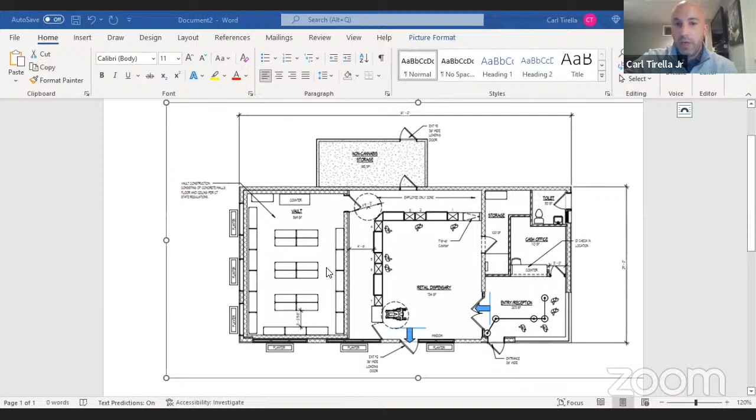Stephen Hambrecht, did you want to add anything about the site or the building? Hello, Stephen Hambrecht, I'm the architect on the project at Hambrecht Olson Design. No, I think Carl covered it. He mentioned that we will be modifying the drawing to respond to the staff comments, but Carl covered it. Okay, no additional comments.

Thank you. This facility is going to be open during the hours permitted by the zoning regulations, which is Monday through Saturday from 9 a.m. to 8 p.m., and on Sundays from 9 a.m. to 3 p.m.

With respect to the site itself, we will add the requested sidewalk to the plans and revise the driveway in accordance with the comment from the city traffic engineer and from construction services, as well as in the staff report. There are some other changes we are going to make, such as agreeing to fix any section of the chain link fence along the periphery of the property.

Other than that, if you have any questions for us with respect to the site, I think we'll wait to discuss the overall site plan until we make those changes and come back. John Malazzi is here tonight to answer any questions you might have right now, but I really don't want to go through the plan twice when we're going to make changes to conform to many of the requests. So that's really all we have this evening, unless there's any questions for anybody.

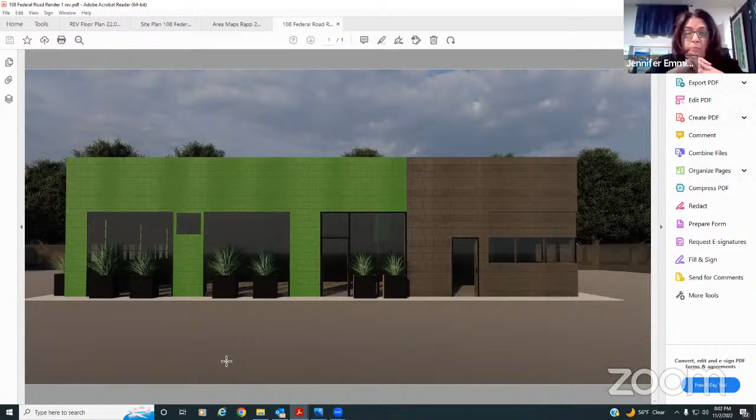Okay, so although not mentioned in our staff report, I think, and I'm posing this to the planning commission, if the color scheme, the green and the brown, is something that is consistent with Federal Road. It seems a little out of place along that portion of Federal Road. So that would be one of the staff's concerns, although not noted in the staff report, the color scheme that was chosen. If it's possible, if they could tone that down a bit and have something more consistent with Federal Road.

Jen, I'll speak to that. Yes, it's possible that we tone it down, and yes, it's possible that we change the colors altogether to be more conforming with Federal Road. We will have that submitted to you within the next week or so.

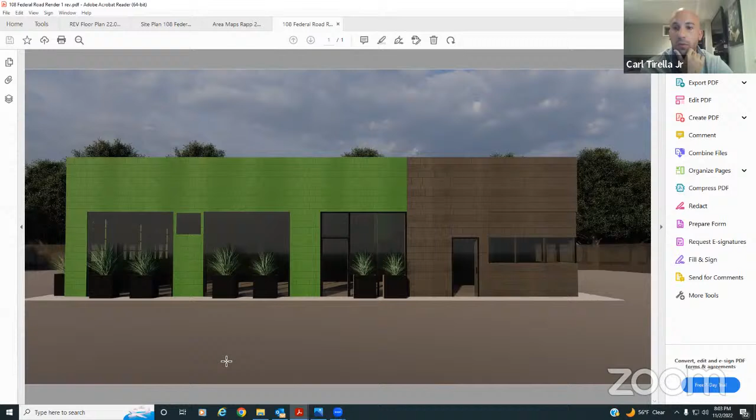So that's fine, thank you. No problem, thank you, Mr. Chairman. Thanks, Jen. And Jen, thanks also for distributing the copy of section 3C4 for everybody. That's still very new, and it's a good idea to keep that in mind as we hear these new applications. So thank you for that as well.

I did not call the opposition. Is there anyone wishing to speak in opposition to this application? Anyone in opposition? Is there anyone wishing to speak in opposition to this application?

Members, as Jennifer mentioned, I think she mentioned, we're not in any position to close this public hearing this evening. We're waiting for quite a few things. Obviously, the applicant still wants to do more of the presentation. I believe we're waiting for the police report. Anything else, Jen, are we waiting for?

Off the top of my head, I think we're waiting to hear from the chief of police. I can't remember if we have the fire marshal's report, but we'd really like to see that report from the chief of police. So my suggestion would be to keep it open. Fair enough.

One last time, commission members, any questions for the applicant at this time? Hearing none, I'll entertain a motion to continue the public hearing until our next meeting. So moved. Second. Motion made and seconded to continue this public hearing until our next meeting. Is there any discussion? All in favor, please say aye. Aye. Opposed? This matter will be continued until our next meeting on November 16th. Thank you, everybody. Have a good evening.

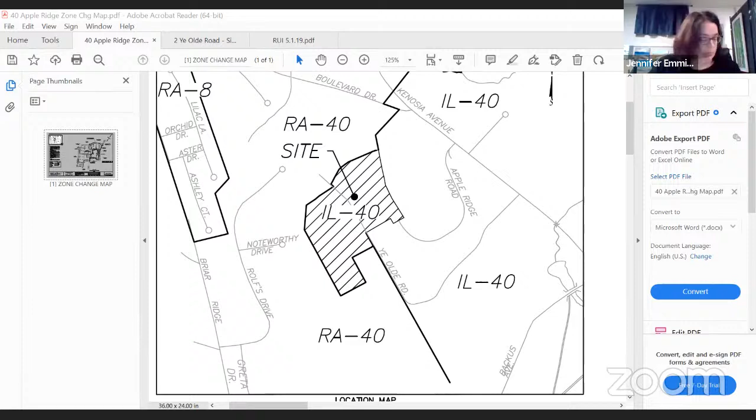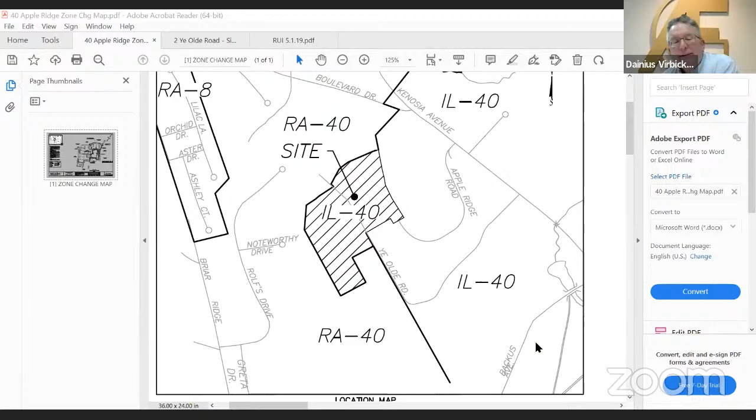Did that transfer over smoothly? No. Not able to see that picture? No, it's still on the zone change map. Oh. I'll get to it yet. Oh, here we go. How's that? Nope. Oh my gosh. Oh, there we go. There it is.

Phew, okay. So our site at 2 Ye Olde Road is located where I'm circling the pointer. And then the Cartus site, or the zone change itself, will be from about this portion on Apple Ridge Road. So again, pretty well removed from that.

Of course, you've got this Hologic building located between our proposed site and the perhaps future school campus, and then you've got this building as well.

So we're pretty well distant and shielded from the school itself. And now, if I may, I'm going to try and start sharing some of these videos, if I may, and let's see how this works.

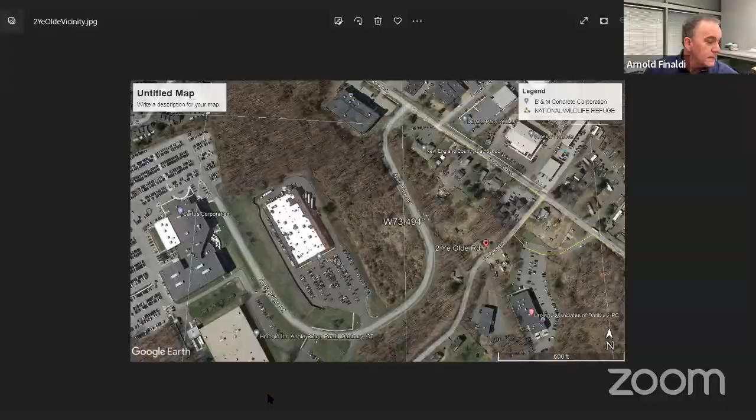So I've got it. Has that popped up on your screen yet? Yes, sir. Terrific. So this is just one of the many examples that we have of the actual trucks from Hat City driving up and down Ye Olde Road in its current condition.

And in this particular video, we happen to have it timed just by happenstance when a delivery truck is leaving the Hamar Laser site, which is located across the street. So I'll just set this in motion. It may be a little jittery, but it gets the point across.

Here you've got two vehicles traveling in either direction and clearly passing. Now I want to note that on this particular video, the road is about 21 feet wide. And that's as wide as it's going to get in this portion of Ye Olde Road.

And that limit was established by the development that took place at 43 Kenosia, which is just on the left side of this rock wall. I'm going to see if I can't get into some of these other videos.

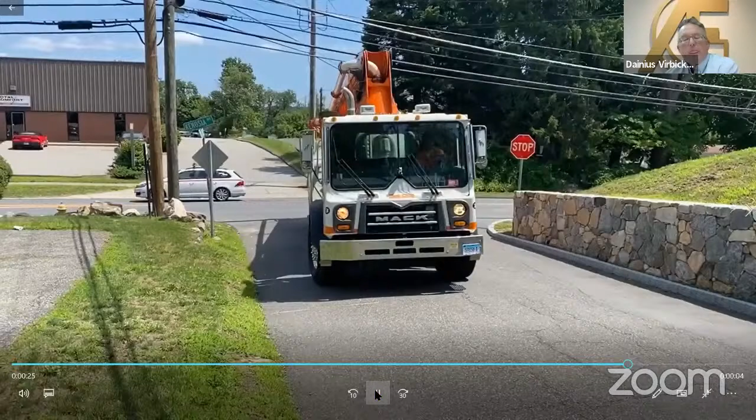And traveling pretty much without any issue or any excitement. Now I'll get into perhaps some other videos.

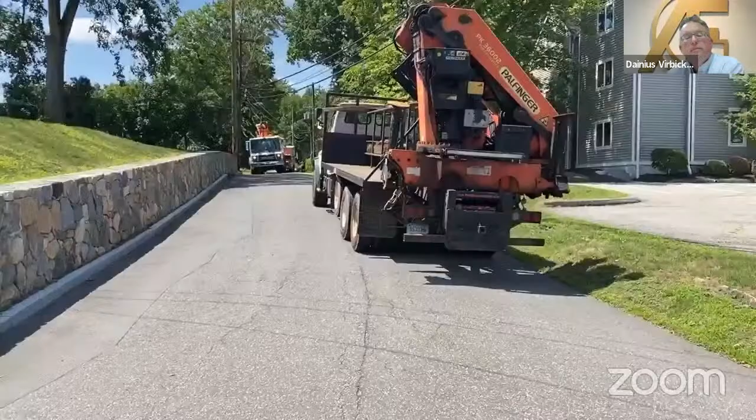And you'll note it's tight, but doable, with plenty of space on all sides of all vehicles.

So Dainius, this is Arnie. So this video demonstrates toward the end of the road, Ye Old Road near Kenosia, if you have 21 feet width, the two trucks can pass each other. Now you're going to be widening farther up the road. Is it at any point on Ye Old, after widening, narrower than 21 feet?

So yes, it does get narrower once you get beyond our property frontage. But what we're proposing with our application is to start a taper from that 21 feet up to 22 feet as we squeak in just to our property frontage, at the beginning of our property frontage or nearest to Kenosia Avenue.

And then once we've gone into our frontage, we have the luxury of being able to grant a bit of our land to the city so that we can widen the road out up to 24 feet along for the majority of our frontage. And then, of course, once our frontage runs out, we have to transition gently back down to the existing road width, which is about 21 feet at the northwest portion of our site.

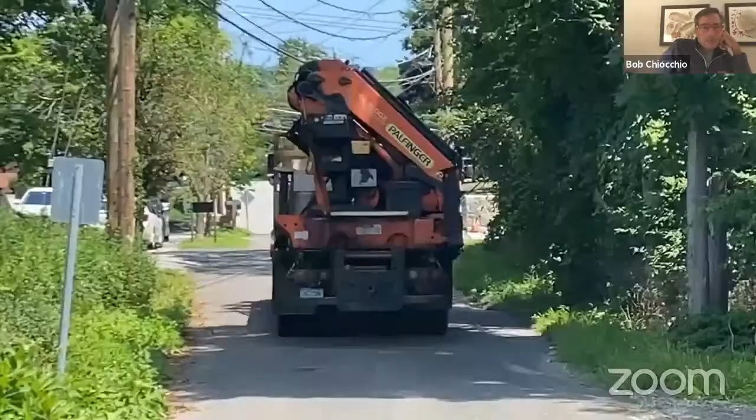Here now you'll see this truck actually leaving from the southwestern portion of the site and driving away. You basically saw it drive through the narrowest section in our frontage, which currently exists, which we will be widening out to 24 feet.

Right now, as it exists, that bit of road is about 17 feet wide. So however often the deliveries come and go to our neighbor across the street, it's clearly possible and physically possible to accomplish that task, and has been for years.

Our trips will be similar in nature, however likely not as frequent as one would think, because the number of trucks is limited and the timing of the business is such that the trucks generally leave the area by 7 o'clock. So we're trying to establish that the road works as it is and will continue to work for us.

Dainius, I'm sorry. Mr. Finaldi, have a question from Mr. Chiocchio. Go ahead, Bob. Sure. Diane, you could leave that photo up at the moment. I just want to confirm, and maybe you can go through it again just to verify as far as the width of the road.

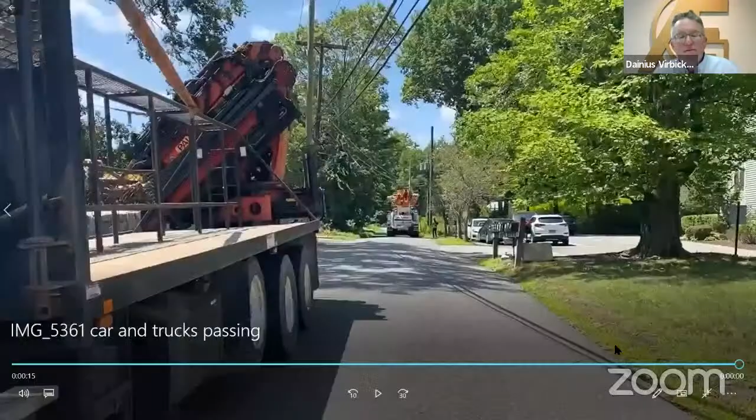Again, here's a video of somebody leaving the site, just a standard van, and then 2 trucks from Hat City passing side by side, again in a 21-foot wide section of road—clearly physically possible without any excitement at all.

Here's a pumper truck now turning in from Kenosia. I know that there are some questions about how the trucks are able to turn in, turn out, and such.

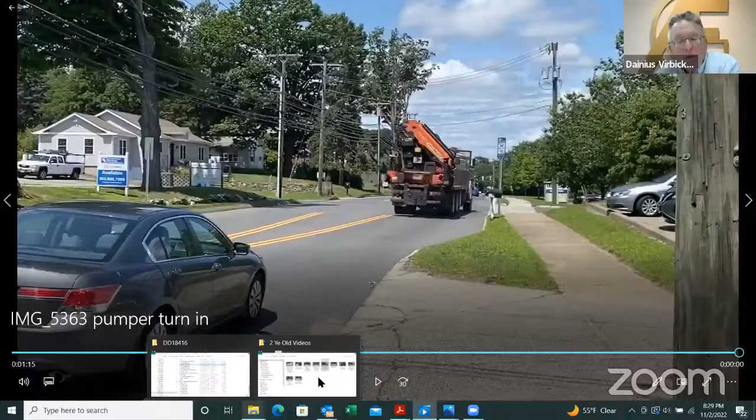And so that's that, just a couple more, and then we'll go to something a little more exciting. Here's another truck entering into the site.

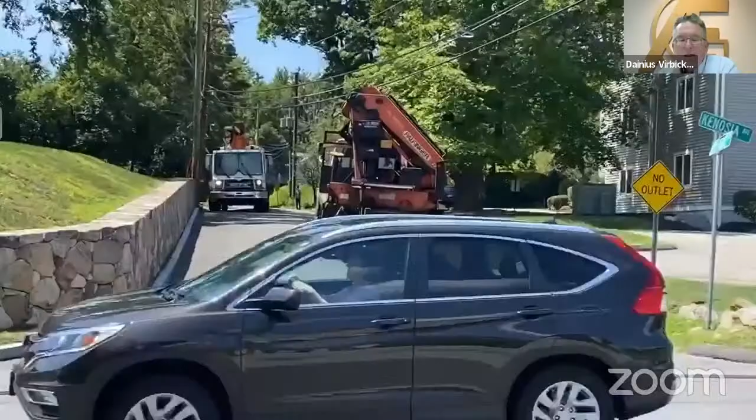I'd like to note that from that direction, as the truck was turning in, Kenosia Avenue is about 30 feet wide, but as you continue on Kenosia in the easterly direction, it narrows down to about 25 feet wide. So the trucks and all vehicles approaching here are not really traveling on exceedingly wide roads. Everything is pretty much the same.

There's a video of a truck leaving the site. Again, that's under existing conditions, and it's anywhere from 17 to 18 feet wide in this section of road. So we will be seeing quite a big increase there.

We'll get one more into this, and then we'll cut out to something more. So here's just the ability of trucks passing one another. Should there be a truck stalled out or parked on the side of the road, again, it can easily bypass without any issue. And there we go, turning right onto Kenosia, or left onto Kenosia.

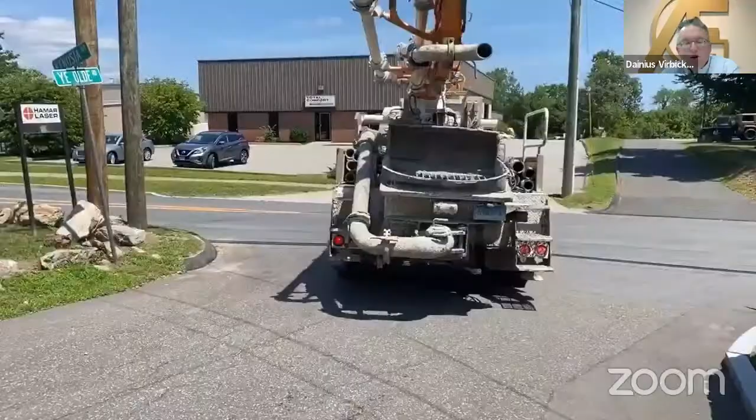So thank you for letting me share those with you. I'd like to bring up a point now. We were talking about the 21-foot width, and how we really cannot widen that.

There's a similar contractor's yard use that occurs on the corner of Kenosia, 43 Kenosia. That would be, as you're standing in Kenosia looking at Ye Old Road, the property to the left, on the left side, where that nice retaining wall was built. I'm just going to share a little snippet of the site plan that was prepared for that.

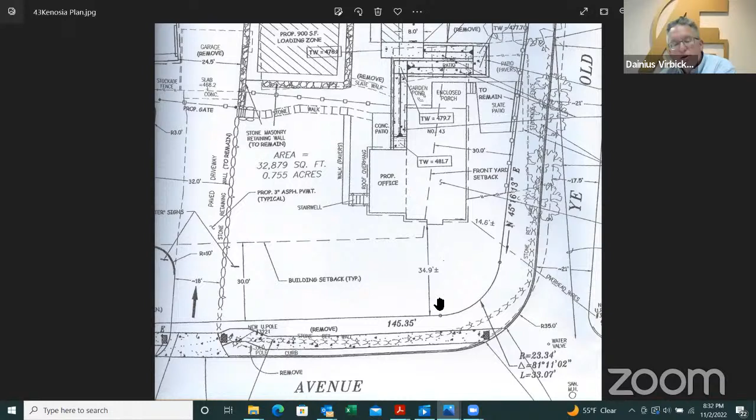I had noted during the public hearing that the vehicles leave onto Ye Old Road. You can see on the site plan, as we zoom in, this is the only driveway that's specified as two-way travel for this particular parcel. I had noted that, and I think somebody had disagreed, stating that all the trucks or vehicles leave onto Kenosia through the other driveway, which, again, according to the site plan, was inbound only. So just a point of clarification on that.

I've got some other aerial photos, but we've shown those, I think, to the degree where everyone understands.

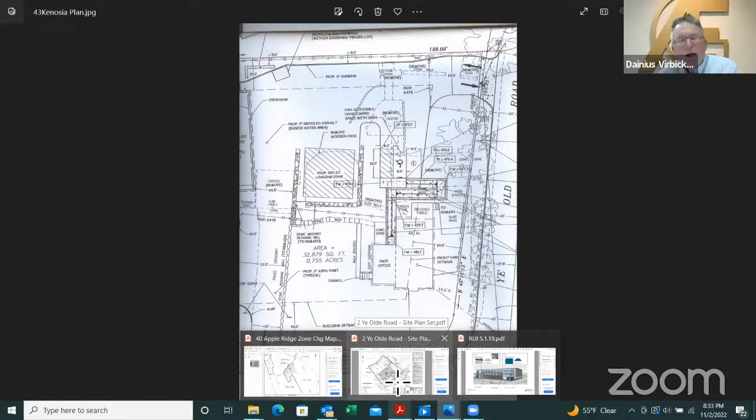There was a comment made by our neighbor who was concerned about water use. I just wanted to point out that in our analysis, sharing now the site plan document, it would be our neighbor right in this portion of Ye Olde Road, the residential use currently occurring on our side of the road. That neighbor was concerned about well water use.

Based on our analysis with 10 potential employees on a given day, which is kind of a high estimate since for the most part we're only going to see 2 to 3 people regularly there for more than just the start or end of the shift, we analyzed it as 10 employees at 20 gallons per day per employee, running about 200 gallons of sewage effluent going to the septic system. So on average, we're probably looking at 220 to 250 gallons a day of water usage, maximum potential.

And what does that equate to? From a health code standpoint, which is basically how water usage and sewage generation is calculated, that amount of water is less than would be expected to be used from a 2-bedroom home. So I think the fears that our neighbor has, although I understand it looks like a big building and it's going to be a lot of water usage, it's not the case at all.

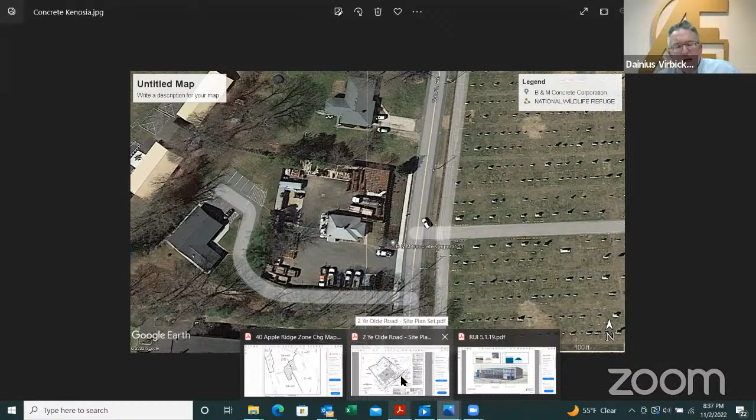And the key to a successful business, and you'll see how nice and neat everything is, so they need to keep things neat on the site for ease of transport and loading and offloading of the forms and elements associated with the business. So I just wanted to point that out as well to the commission and to all those listening. I think that addresses comments that were made by the public.

And I'm happy to answer any questions that the commission may have in addition to what I tried to relay. Any questions for Dainius at this time, commission members? Mr. Chiocchio, go ahead.

Dainius, just one last question on the water usage. So there is an on-site well, if I remember correctly. There is no public water. And the question, I guess, is it's not a shared well at all - the well on site is for your use only? Correct, that's correct. And again, we'll have that well clarified, treated if necessary, certainly tested for volume and quality of the water. But again, we're waiting on some information from the health department to see what they might or might not have on this site. But they suspect not much because it's been a while since anyone's been at that location.

Yep, got it. Okay, and then one last question. Just help me with this - I'm looking at this application and, you know, going down from Kenosia down Ye Olde Road, you first see, I guess it's an office building there on the right with some parking lot and stone wall, and you don't really see much on the left. And as you continue, there's kind of a little bit of a contractor's yard, and the road narrows, and I know you're going to widen that to 24 feet, and it gets, even though it's industrial zone, it gets more residential down there, as a lot of the public comments you heard.

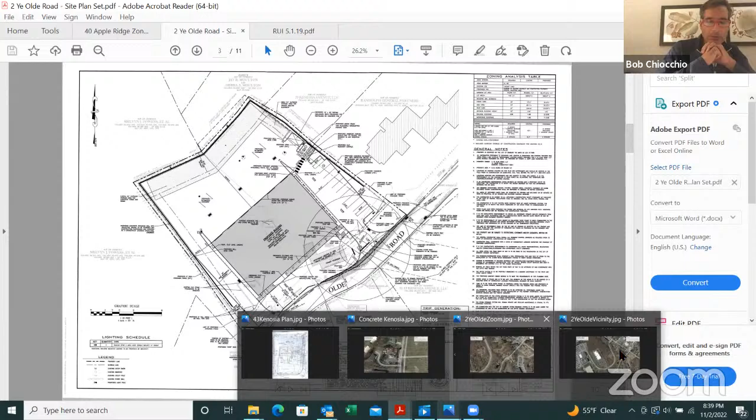I'm struggling a little bit - as you get to your property, all of a sudden we're going to see a 17,000 square foot building, 35 feet tall, which is a pretty large building, coming into kind of, I'll call it a neighborhood, even though it's industrial zoned, and you'll have a single family home next to you. I'm just struggling a little bit. Maybe you can help me with compatibility with the neighborhood.

Sure. So what we're proposing is where we are being compatible with the neighborhood and with the zoning. Yeah, I get the zoning part, I get the zoning part. It's just, you know, the compatibility with a 17,035 square foot, 35 foot high building in this area. When you're driving down the road, what you see, and then on the right, you'll see your project, and just the compatibility there - it's just, help me a little bit with that, how you would support that.

Yeah, so I mean, again, I would support it in the fact that the proposed use is compliant with the zoning regulations. If we didn't want to store the forms for the concrete use outdoors, we wouldn't have to come to the commission. It's an approved use in that zoning district just by site plan review. So really what we're talking about here is the ability to store our forms outdoors. That's the only difference between what we're proposing for the use on the site, and the difference between a site plan versus a special exception.